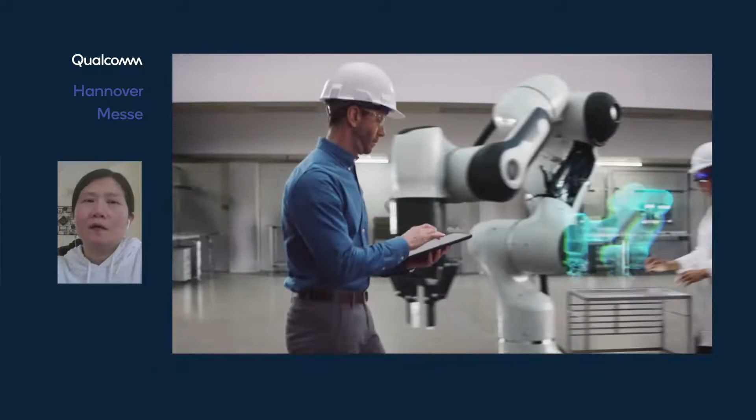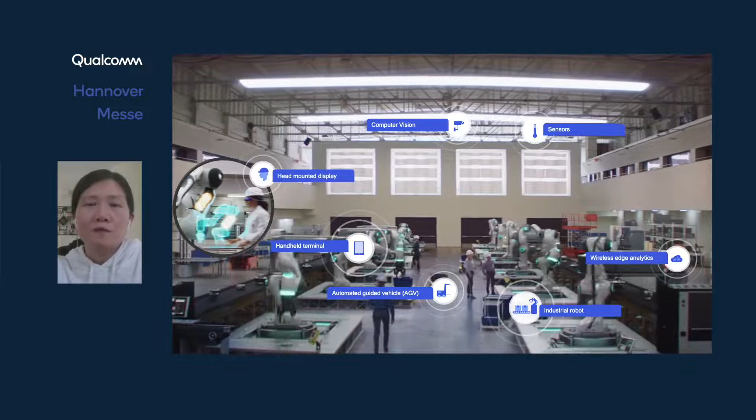Now let's take a look at the future industry, where we can see there are lots of use cases and diverse requirements in industry deployment. If we look at the head-mounted display, we can see the data rate is very high, up to gigabits per second. On the other hand, if we look at massive IoT for process monitoring, we can see the data rate is not very high, but you have to support a massive number of such IoT devices.

Now when we zoom into motion control in the industrial robot, we're talking very high reliability and low latency. The latency can be as low as 1 millisecond, and the reliability can be as high as 6 nines. So all these diverse use cases and different requirements in Industry 4.0 will be addressed with 5G design and specifications.

Now let's look at one of those features one by one, starting with the private network. So what does the 5G private network offer for industrial IoT? First of all, the private network allows us to deploy a dedicated local network where we can use dedicated resources that allow us to manage the network independently.

Secondly, the private network allows us to achieve better security so that sensitive data can stay on-premise without going to the public cloud. In addition, the private network allows us to have performance optimization for target local applications. For example, if we are looking for motion control in industrial deployment, and we're looking for low latency and high QoS requirements in 5G applications, we can deploy those techniques to achieve such requirements.

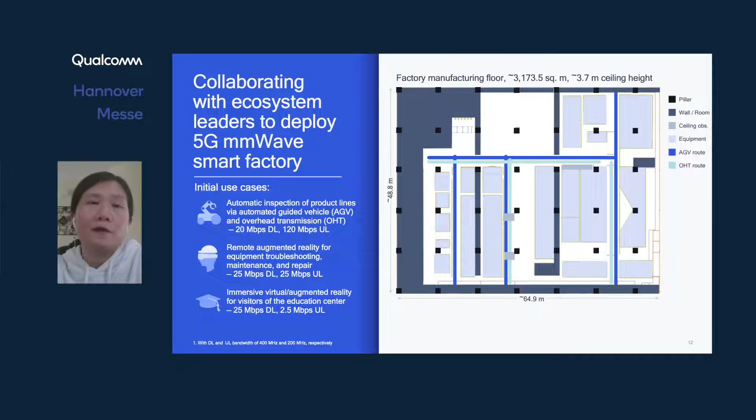Indeed, with such dense deployment, it is very useful and attractive for us to deploy 5G technology in the millimeter wave band in a smart factory. So Qualcomm is collaborating with 5G ecosystem leaders to deploy 5G millimeter wave in a smart factory.

Here we show a particular example where we have this manufacturing floor, which is around 3,000 square meters, and up to around 3.7 meters high. In this case, we are deploying a 5G non-standalone network where we have 400 megahertz downlink and 200 megahertz uplink in the 28 gigahertz band.

Our measurement indicates that we can have median throughput greater than 1.5 gigabits per second in downlink and more than 120 megabits per second in uplink. With such great throughput, we can support different use cases, for example AGV, augmented reality, and virtual reality, which we will use a lot in industry applications.

Indeed, the private network in 5G also drives new efficiencies and innovations with the integrated 5G private network and edge. For example, with a 5G private network, we can have sensitive data stay on the private edge to do distributed edge processing, which allows us to do distributed AI. We can also have non-sensitive data going to the public edge, which allows us to do cloud processing.

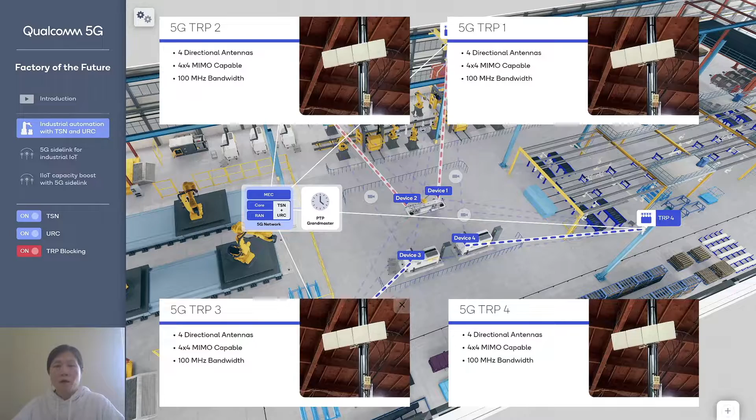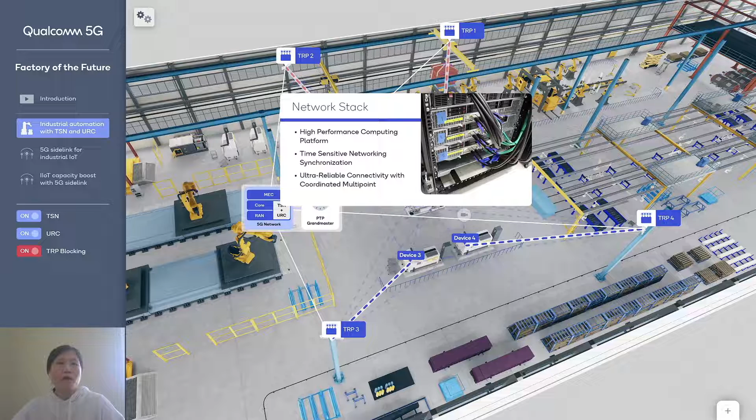Let's zoom into the layout of the demo. In this particular demo, we have 4 transmission and reception points serving 4 devices. On the network side, we have a high-performance computing platform used to support time-sensitive synchronization as well as COMP for ultra-reliable and low-latency communication.

When we enable TSN, we can see that all the timing synchronization across all the devices is within 0.1 microsecond — recall the target accuracy requirement is 1 microsecond. As a result, we can see that the robotic arm doesn't miss any objects.

On the other hand, if we disable the TSN, now we can see that the timing synchronization error across the devices goes up to 1 millisecond.

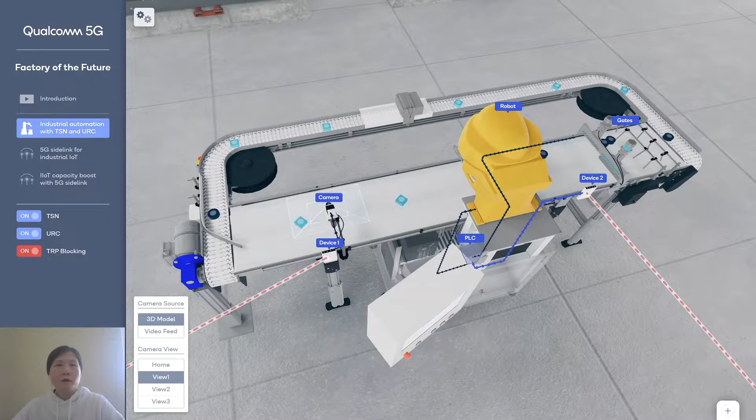Now let's take a closer look at the conveyor belt in the demo. Here we have multiple devices. We have the RB3 vision camera, which takes photos of the objects and uses the onboard AI for object recognition and classification. Afterwards, it sends this information to the PLC. Then the PLC sends out a command to the robotic arm and gates to perform the synchronized behavior.

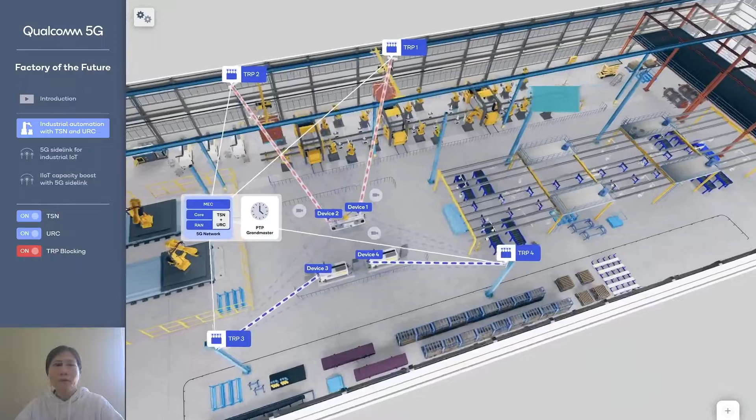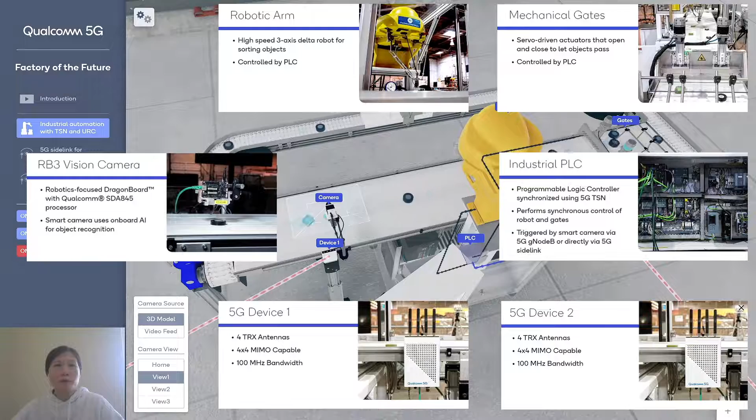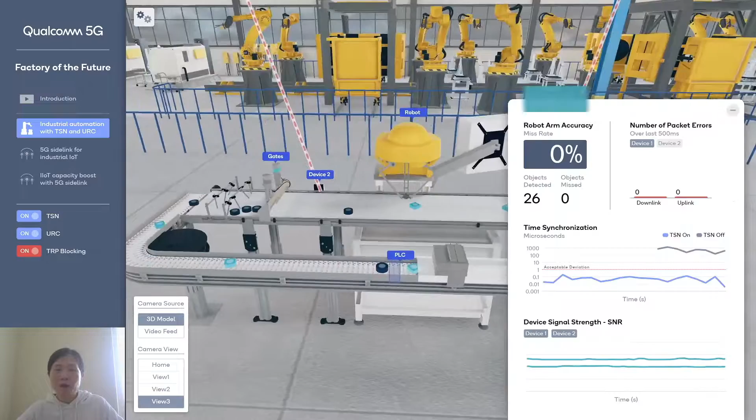Now let's zoom into how this demo behaves. We can see that when we disable the TSN, it may miss the objects because of timing asynchronization across the different objects.

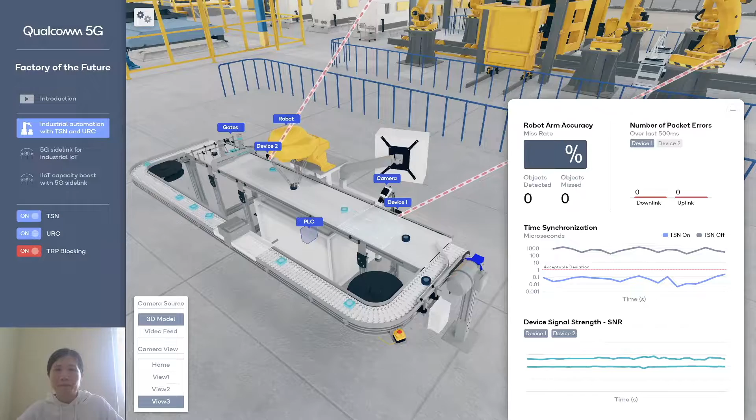So now this is a picture of the live demo. We can see that the robotic arm is picking up the objects and placing them in different lanes based on the object shape, and then the gates open accordingly.

Up to now, we have mostly been focusing on showcasing the ultra reliability and low latency communication, as well as the TSN for industrial IoT. Those are the 5G features which are essential for Industry 4.0.

One thing we want to highlight is that in this demo so far, when device 1 wants to talk to device 2, the packet needs to go through the gNB, which clearly motivates us to enable direct device-to-device communication to further improve the system capacity and enhance system efficiency.

Now let's take a closer look at the Sidelink communication in the industrial IoT demo.

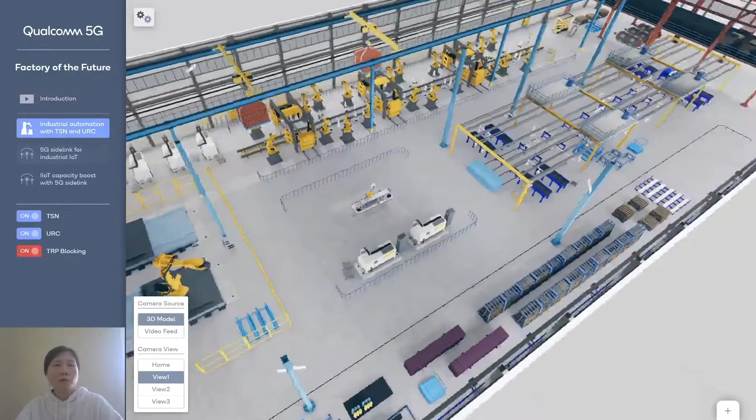Here we are also going to show the benefit of Sidelink communications. As we mentioned before, without Sidelink, when two devices want to talk to each other, they have to send the information through the gNB, and then the gNB sends the information to the other device. Here we can see that clearly this two-hop communication can be improved by enabling UE to UE Sidelink communications. As a result, because we use one-hop transmission compared to two-hop, we only need almost half of the resources, so we can achieve better network efficiency and capacity.

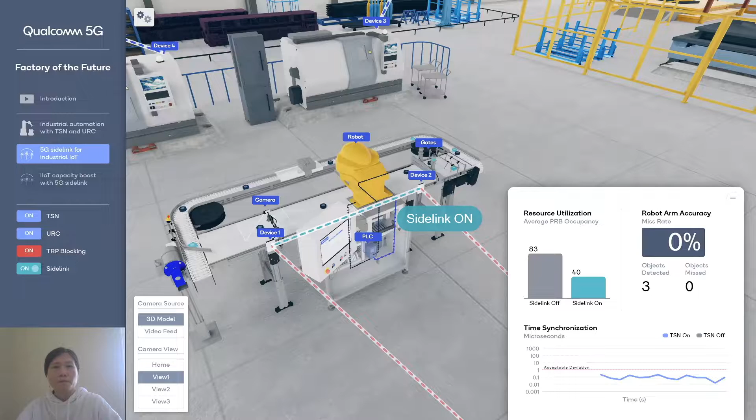Let's also take a look at the IIoT capacity boost with 5G Sidelink. In this particular layout, we have 18 gNBs in a 60 meter by 120 meter layout, and by the way, this is a 3GPP indoor factory layout.

When we disable the Sidelink, when the PLC wants to talk to sensor actuator, we need a two-hop transmission, where the first hop comes from PLC to gNB, and the second hop happens between the gNB and sensor and actuator. When we enable the Sidelink, the PLC can talk to sensor actuator directly. As a result, once we enable Sidelink communication, we achieve 1.8 times more capacity compared to when Sidelink is off.

The second demo is on 5G indoor precise positioning, where we are going to show that with 5G positioning signaling, we can achieve up to 20 centimeter accuracy, both horizontally and vertically.

So in this OTA demo, we are going to show indoor precise positioning through wireless 5G technology. As we all know, 5G is expanding into lots of new vertical areas, for example, industrial IoT.

In this early research, we're going to show in the OTA demo how precise positioning can help further enhance the 5G application.

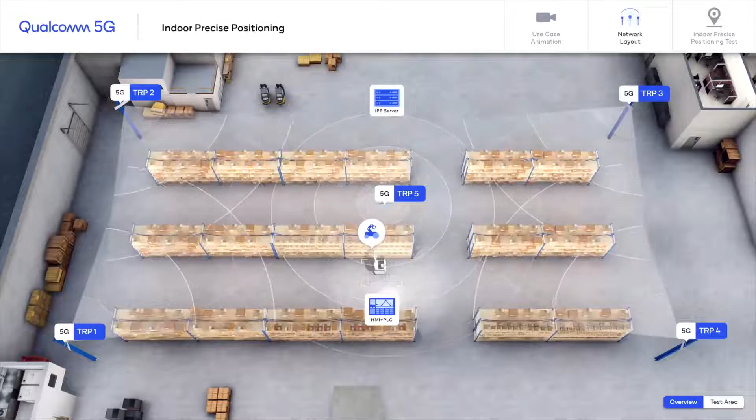Let's now look at the network layout. In this test bed, we installed 5 TRPs, which stands for transmission and reception points. Let's take a look at a particular TRP - each TRP is capable of transmitting with 4 TX antennas and receiving with 4 RX antennas.

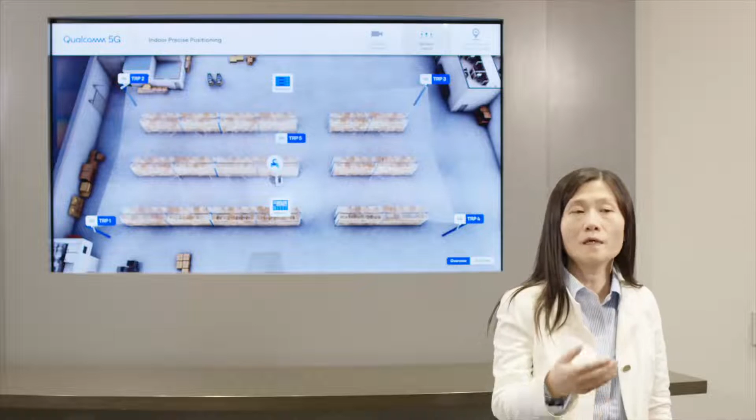In this particular test, each TRP is sending the positioning signal, which spans 400 megahertz wide in an unlicensed band of 6 gigahertz. In this test bed, we are using the positioning algorithm called OTDOA, where the test device estimates its position by using the observed time difference of the positioning signal to the test device.

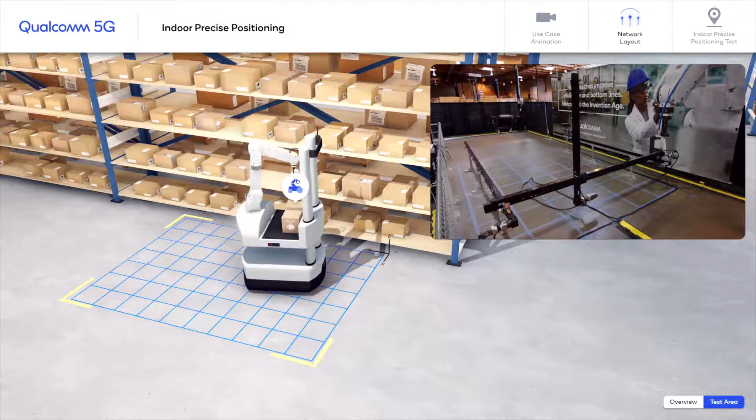You can see the test device moving in this controlled environment, which is 12 by 16 feet wide. In order to compare the positioning error versus the true ground truth, we installed a gantry system. The purpose of the gantry system is to allow us to control the test device to move in a controlled fashion, and it can report the ground truth, allowing us to compare the ground truth versus the estimated positioning.

Now let's start test route 5. With the control of the gantry system, the test device is moving in a route of 5. Let's switch to the 2D view, so we can see better on the horizontal plane. Now you can see the test device moving with a trace of 5.

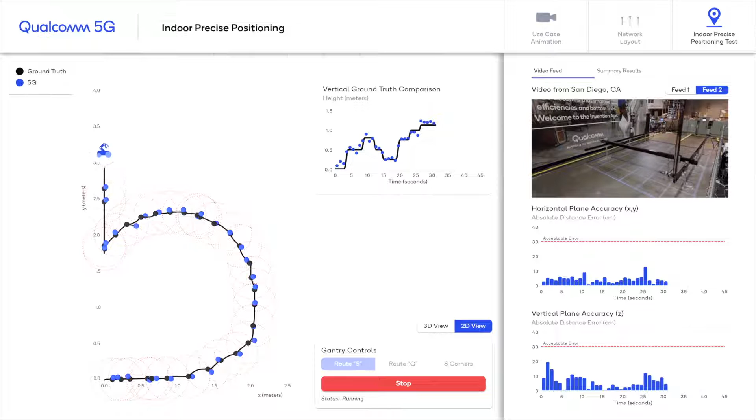On this trace, the black dots represent the ground truth reported by the gantry system, representing the true location of the test device. The blue dots represent the estimation of the position based on our test bed. You can see those two lines track closely with each other. The red circle represents the 30 centimeter tolerance, and you can see the error is way below the circle.

Let's also take a look at the vertical accuracy, which is typically more challenging for the positioning algorithm. Even in the vertical domain, we can see that the error is much below the 30 centimeter target.

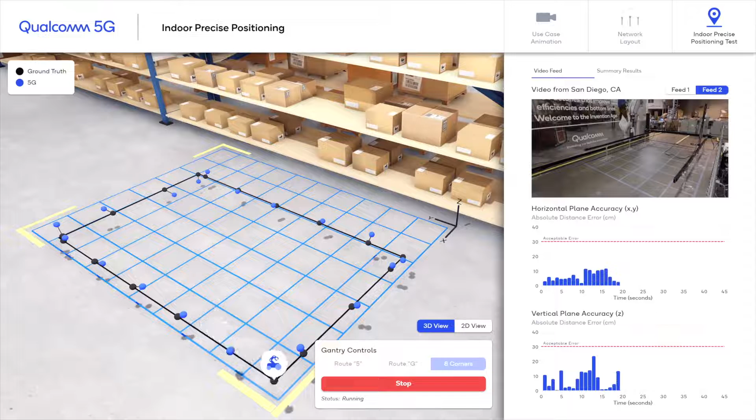We can also start route 8, where we stress test how the positioning algorithm works in a high-speed case. The test device travels through 8 corners controlled by the gantry system. Every time the test device starts a corner it tries to speed up, and when it moves to a corner it tries to decelerate. So every time there's a big speed change, it creates a more challenging situation for the positioning algorithm. But even in those situations, we can see that the error is below the 30 centimeter accuracy.

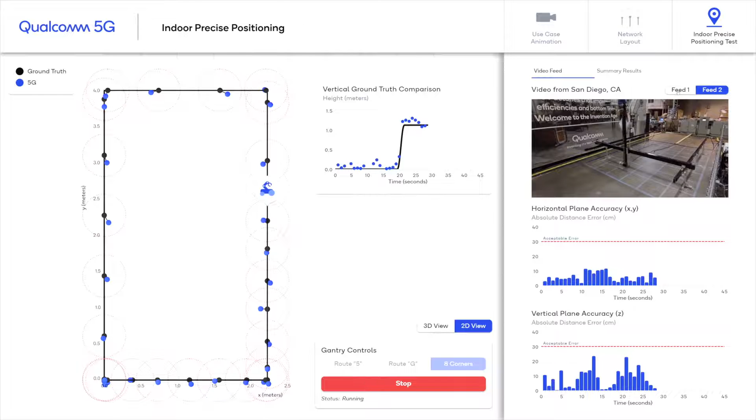To conclude, in this OTA demo we have shown our early 5G research in precise positioning. Precise positioning will be part of the Release 17 study, and we will be using our OTA demo to support our research and standards activity in the Release 17 studies.